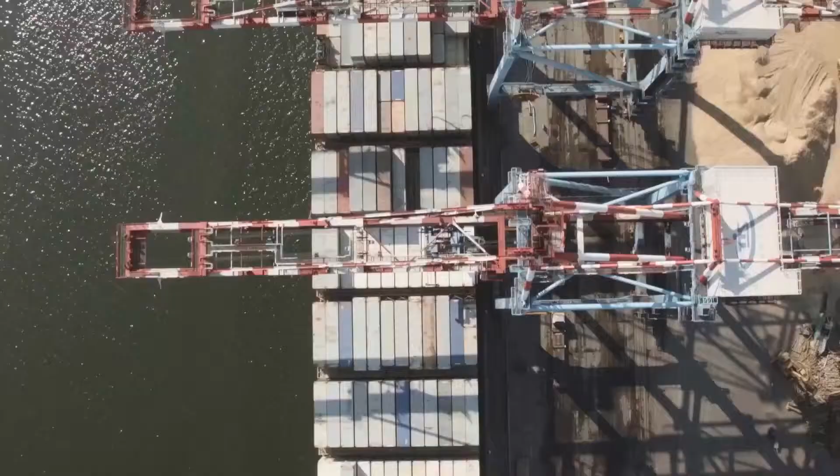Odessa is the grain gate of our country. Our city was the first in Ukraine to open a grain market. Odessa Miller School was the first to educate food manufacturing industry specialists.

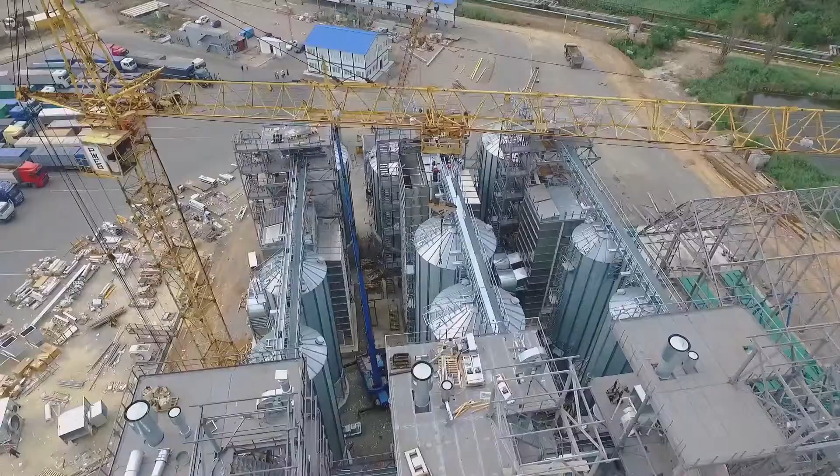We were the first company to start offering the whole range of services for project planning and grain complexes constructing. For more than 25 years, we remain a progressive Ukrainian manufacturer which implements innovative technologies and supplies services in the sphere of grain storing and processing.

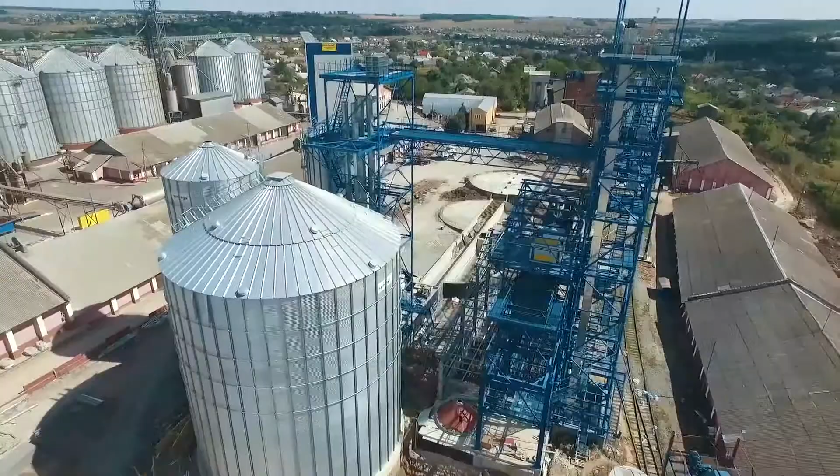Grain Capital Group of Companies is a powerful and solid giant in the Ukrainian grain elevators market. Grain Capital Group of Companies consists of elevator equipment plant and Grain Capital Engineering Company. We perform project planning, designing and building of grain elevators and terminals, as well as automation, dedusting of grain elevator complexes and feed milling plants. Our company manufactures equipment and trains personnel.

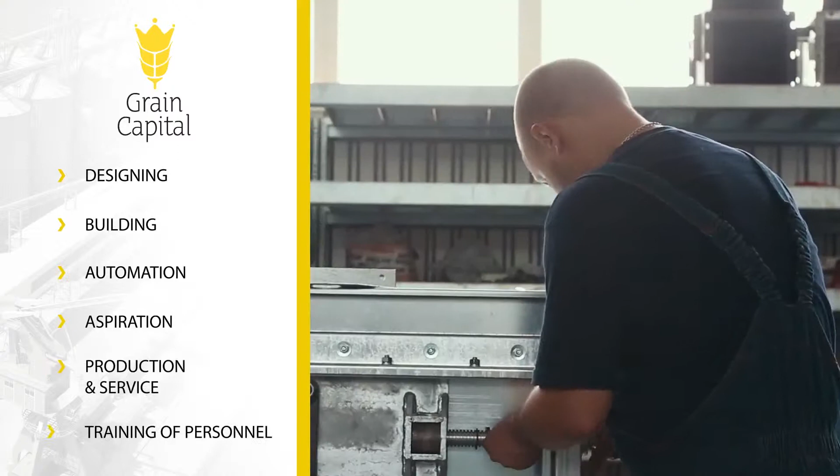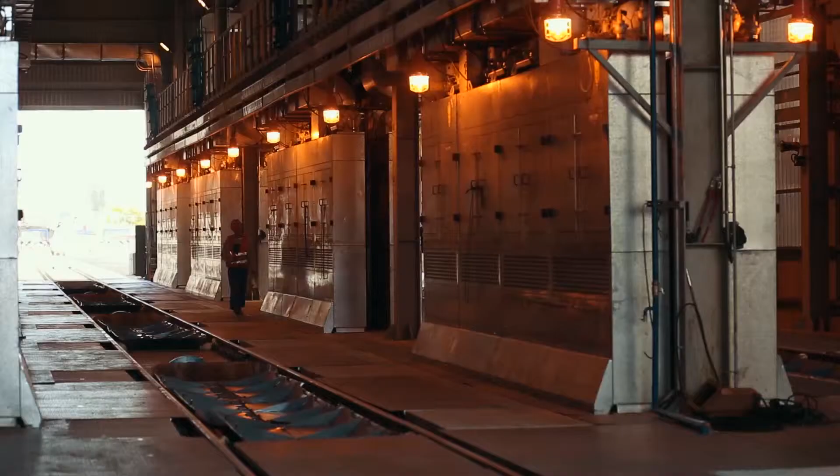Grain Capital Group of Companies' work priorities directly connect us with modernization of cereal receiving points such as grain elevators, grinding mills, feed milling plants on the one hand, and create the conceptually new enterprises on the other hand.

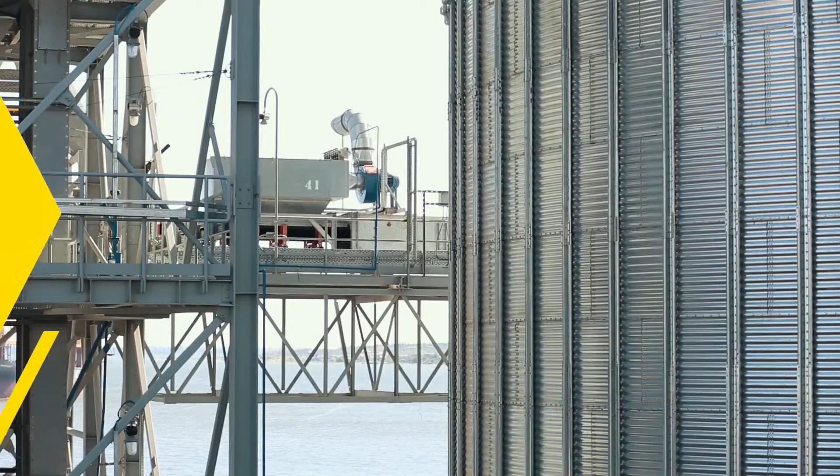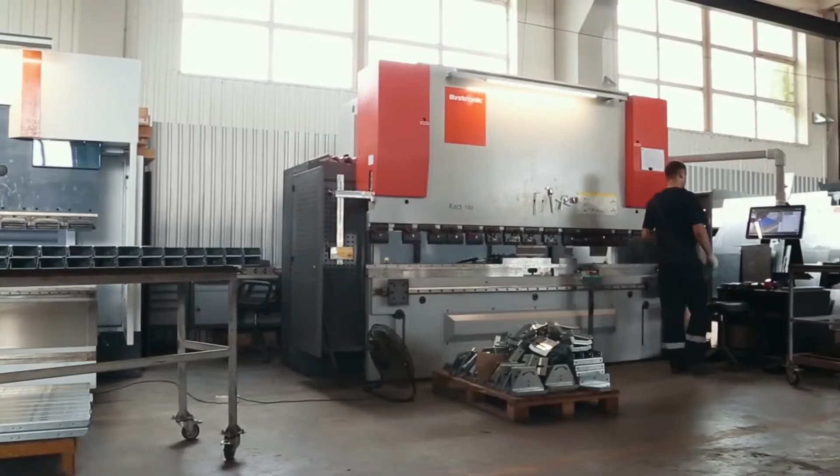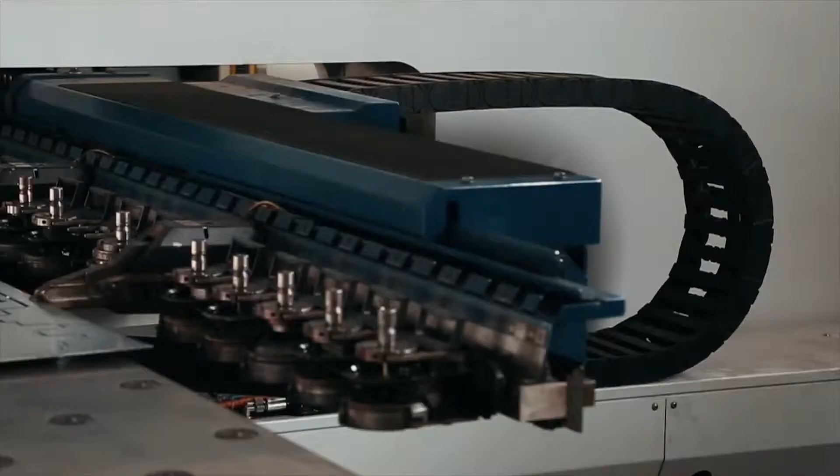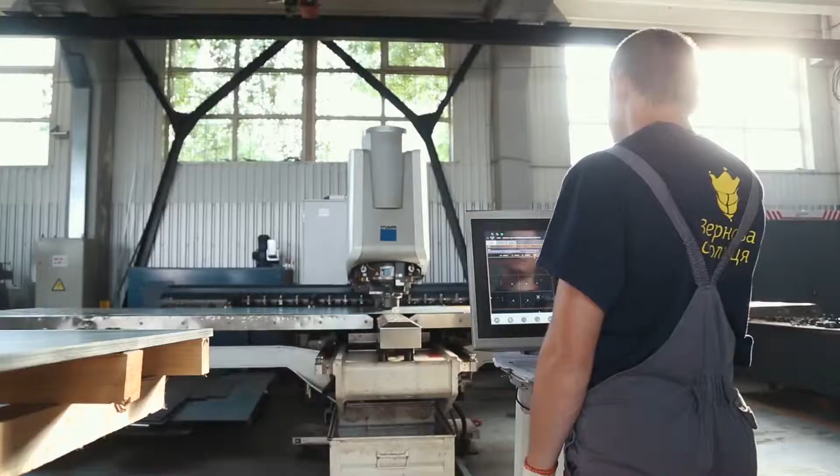ISO 9001 quality system is implemented at the enterprise. All our equipment is manufactured at modern machine tool stations with the use of high-quality imported materials and component parts by leading world manufacturers. Almost all the equipment installed at our factories is of the highest class and allows correct and precise manufacturing of our equipment for international and local markets.

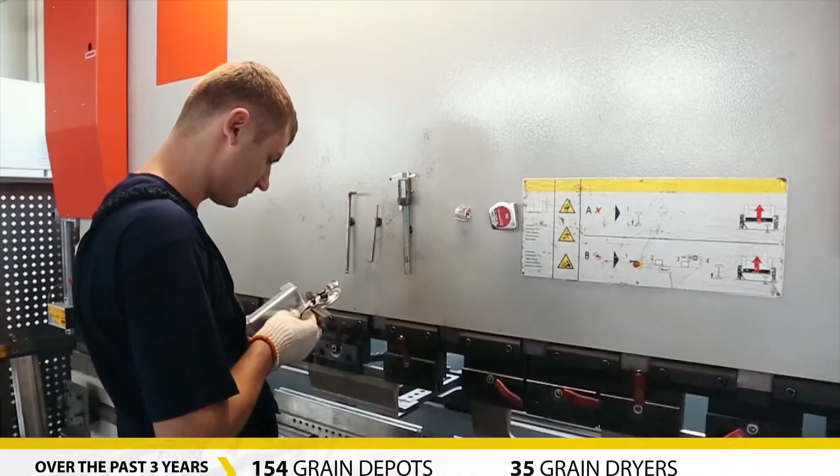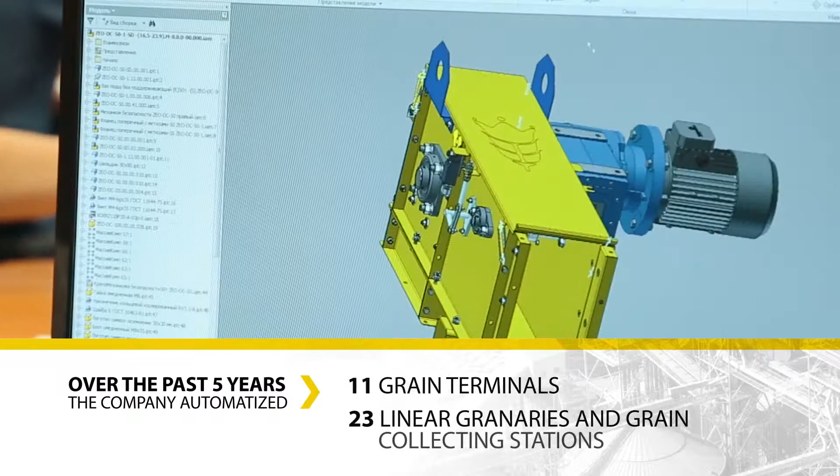Construction development at the enterprise is performed in single environment. This allows construction managers share information, perform total unification of details used, apply component parts of trusted trademarks and avoid mistakes.

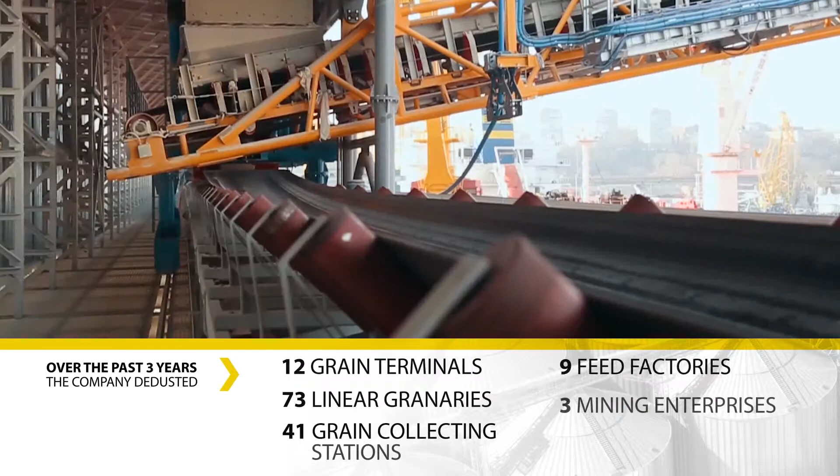Conveying equipment is a base for any grain elevator. Our production facilities allow manufacturing horizontally oriented conveyors such as slider conveyors, chain conveyors, belt conveyors, or vertically oriented bucket elevators.

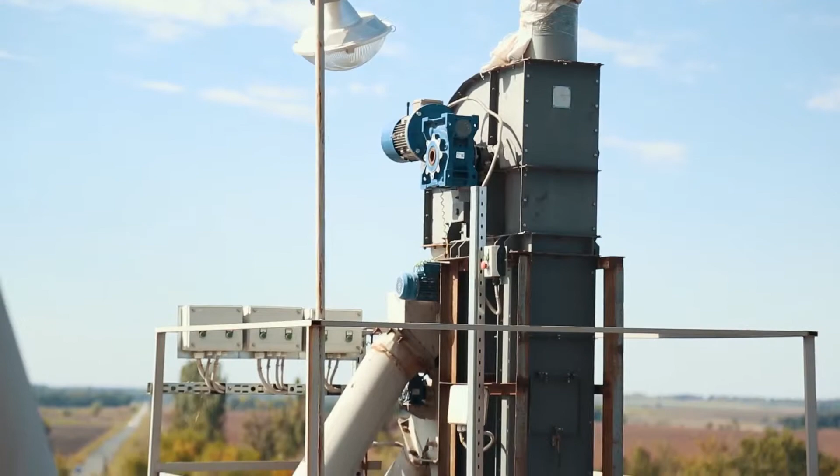Ukr-Elevator Prom company cooperates with Grain Capital Group of Companies for 10 years. For all this time, the company was showing itself as a reliable partner.

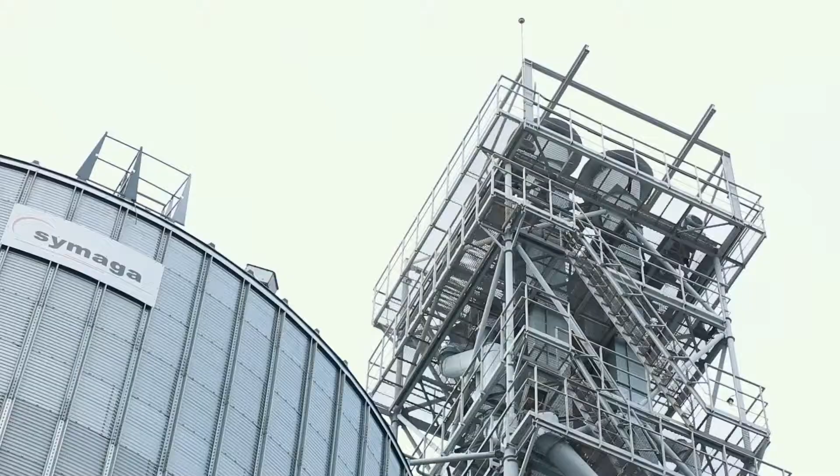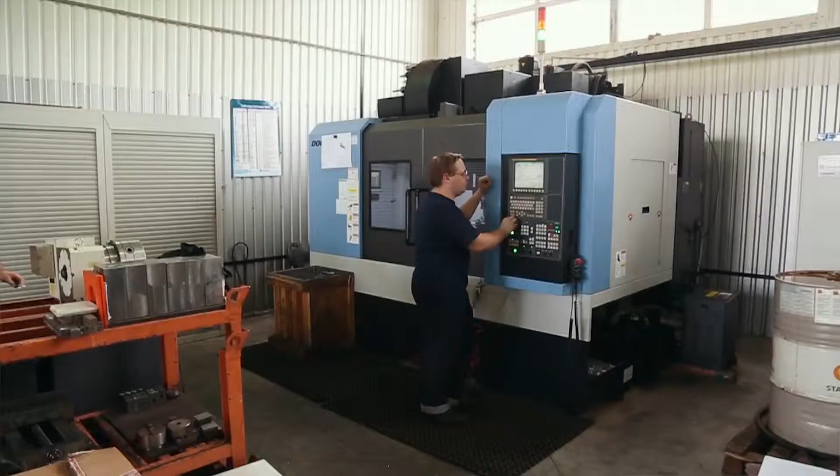For us, the main priorities in creating any new enterprise are quality, processability, reliability, energy efficiency, and safety. Our important advantage is a team of professionals. Their level of knowledge and skills corresponds to the level of employees of the transnational corporations.

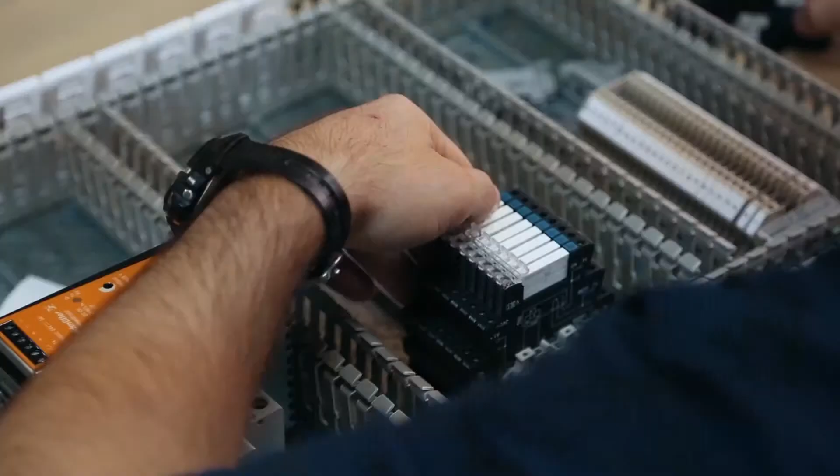Our company is unique in a way that we perform turnkey-ready services from project planning to putting the object into operation and setting up a ready-made business. We do take the full responsibility for this.

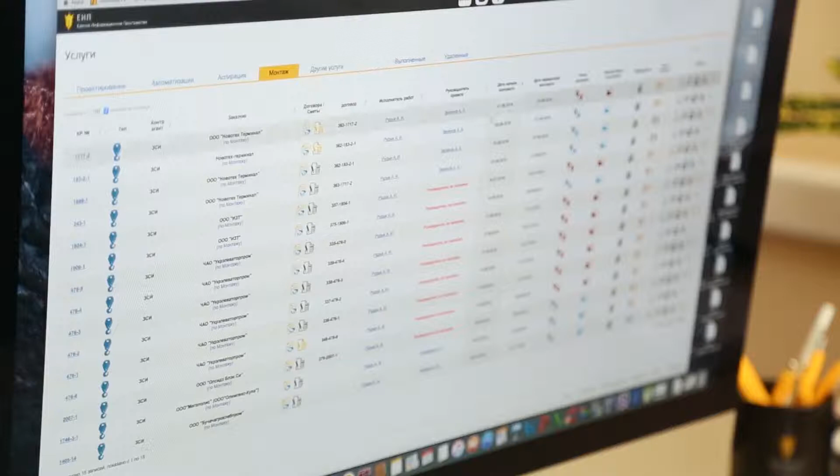Successfully implemented Common Information Space Network has shown itself as a good advantage. It allows effective interfering in any business process that takes place in a company even in time of peak loads.

Properly organized economy is an integral aspect of any enterprise's work. This means honest and transparent relations with suppliers, smart norm setting and fair wages. All this is necessary for creating a successful company ready to supply high-quality equipment to the customer.

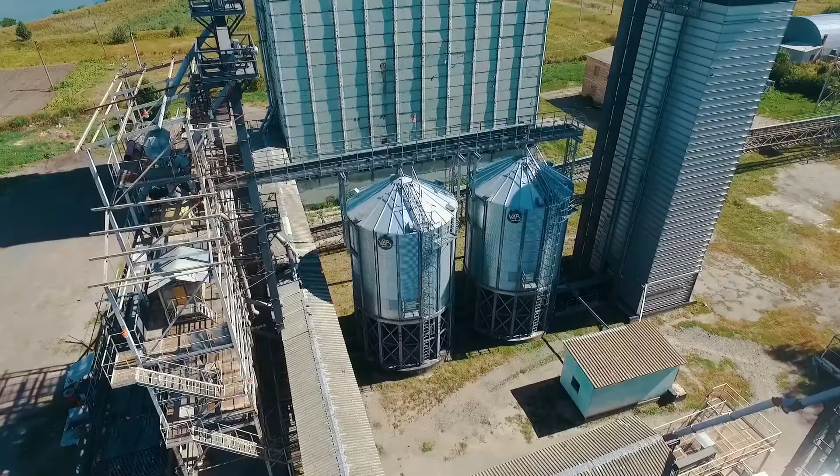Our company owns 2 grain elevators. We have been cooperating with Grain Capital Company for more than 2 years. In 2014 we have put the first grain elevator into operation. We have purchased all the lifting and conveying machines from Grain Capital Company.

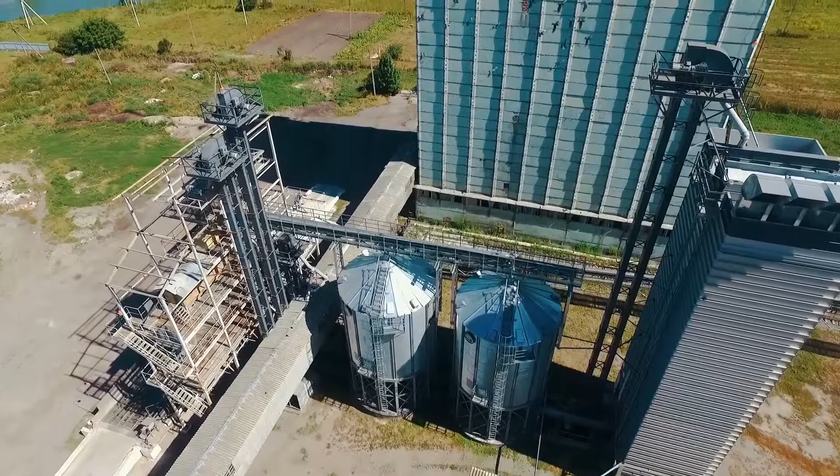In 2015 we have put into operation the second grain elevator complex in Berdichev. Again, we bought all the equipment from Grain Capital. I believe this is the company that has the best quality-to-price ratio in Ukraine.

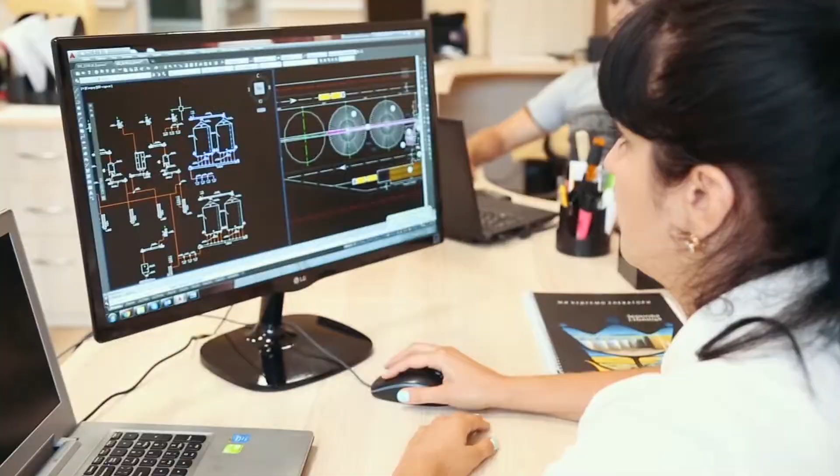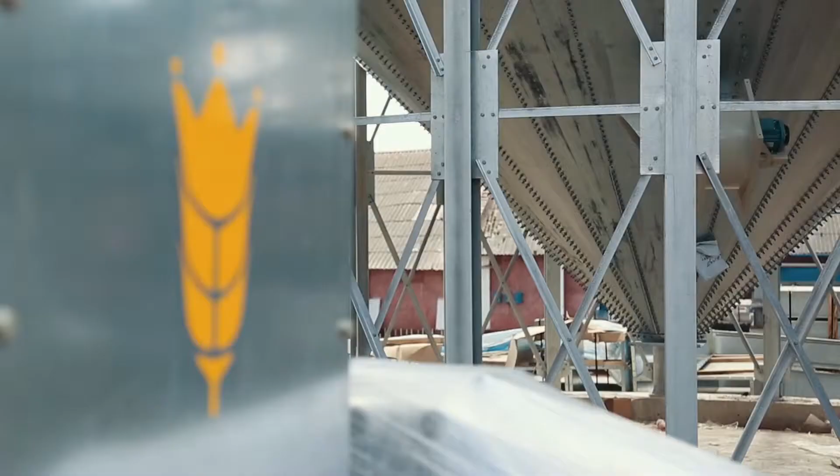We offer our clients a complex of effective solutions in building more profitable grain elevators that possess optimal characteristics and range of advantages in comparison with currently existing enterprises.

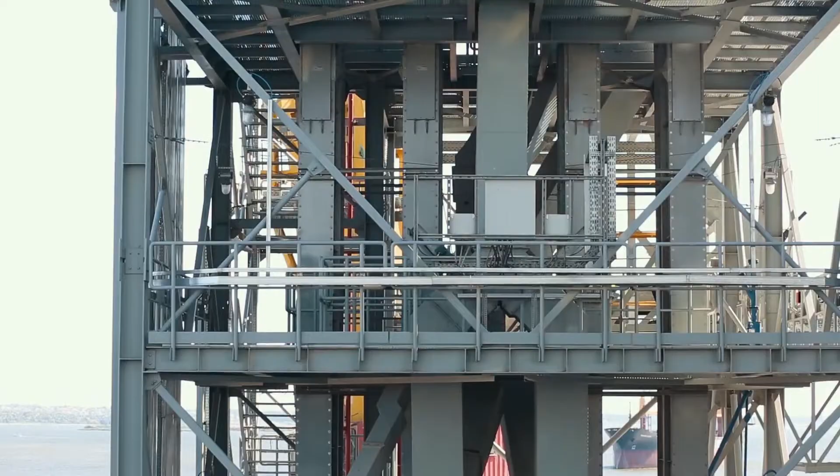I should say the main result of our work is not just a highly productive, innovative equipment that has no analogs in Ukraine. I'd like to mention layout decisions for grain elevators and grain processing enterprises, as well as automation systems, ecological safety systems, and grain elevators building technologies as our main achievements.

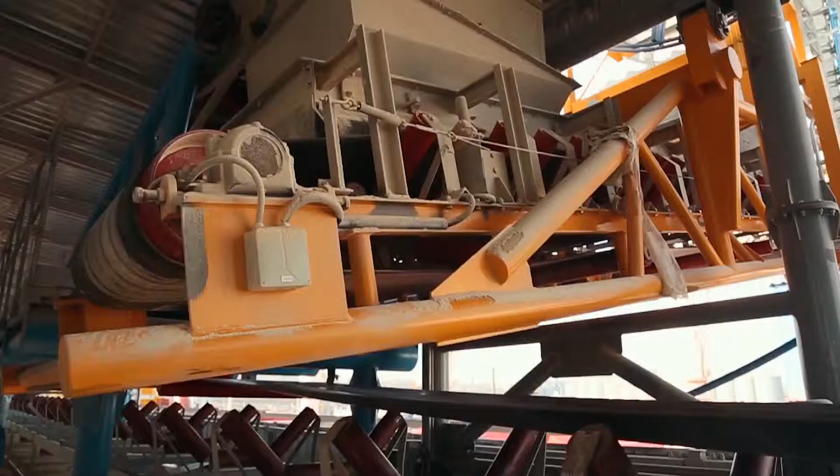We have a maintenance service department in the structure of our company that ensures non-stop operation of our partners' grain elevator equipment. All the emergency cases are addressed in a timely manner and by means of quality troubleshooting.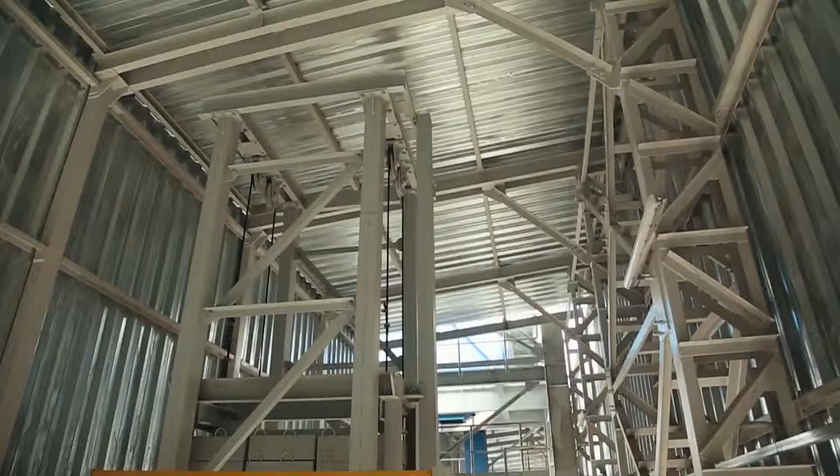Grain Capital is responsible for maintenance service at our enterprise. They perform diagnosis, chronology and all the necessary reports. The company promptly responds to any damage of our necessities. We are with them, so to say.

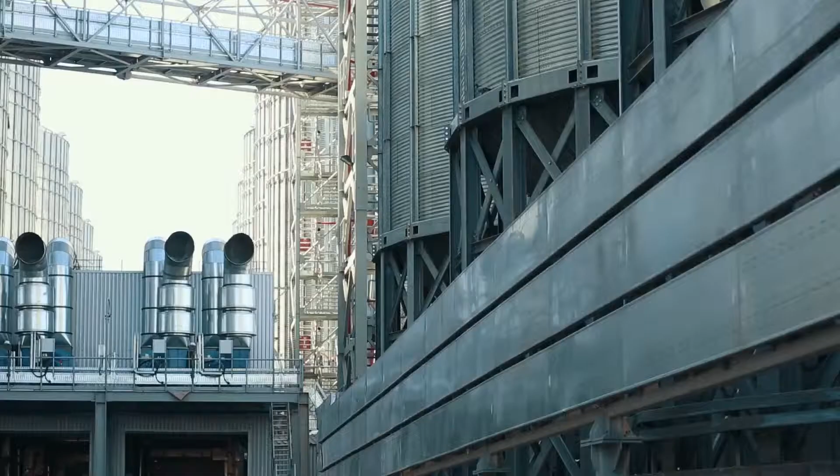Any company's goal is receiving the income, but not every company's CEO asks himself the following questions: How well do you do your job? How social are your rules for the employees and for the country? Are the measures you take innovative and foresighted? We ask these questions every day.

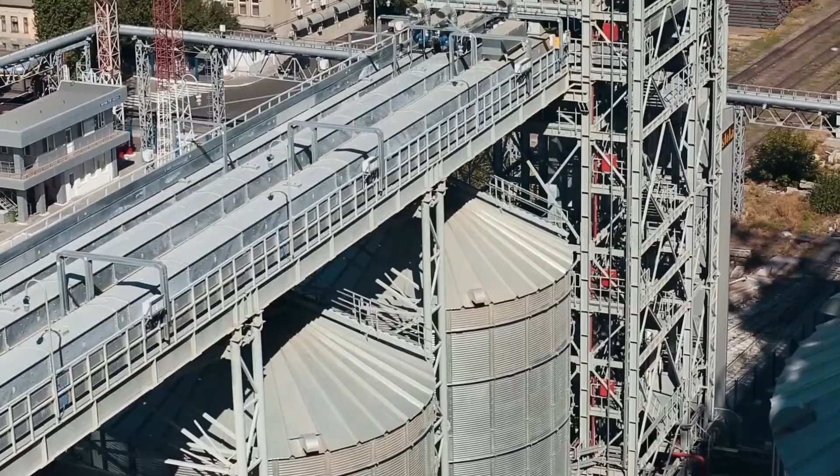One cannot just build a grain elevator and forget about it. Precision, technological perfection and competitive ability of projects we build are the most important things for us. Our motto is "Professionals for Professionals."

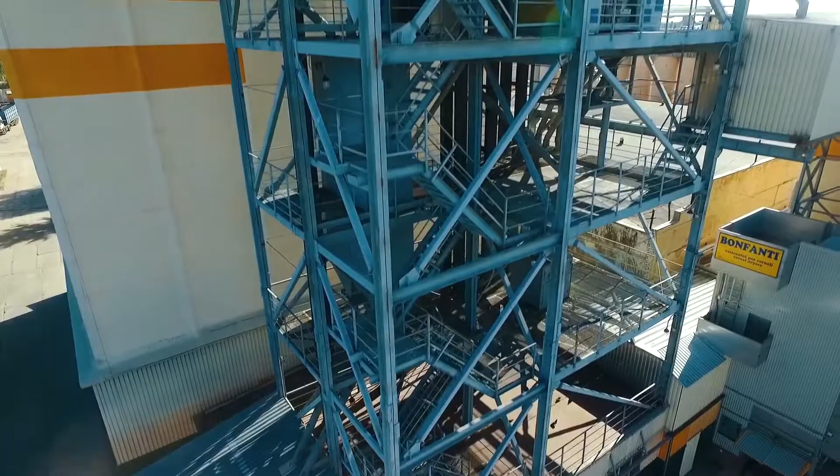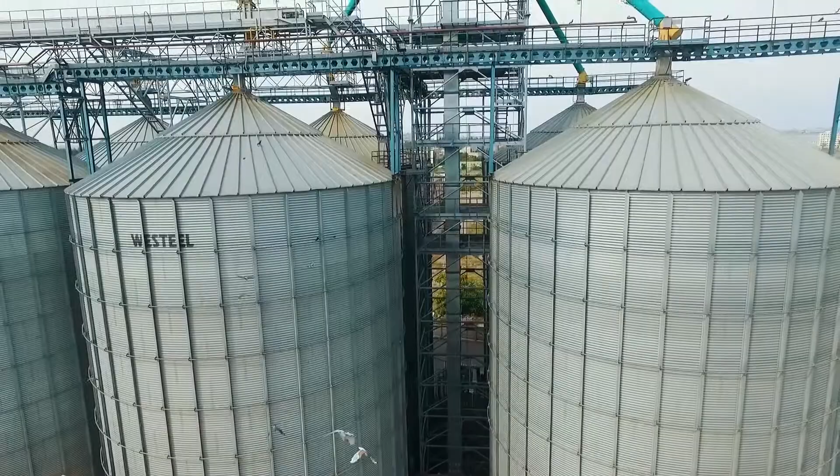Cooperation with us will lead your newly built or reconstructed grain processing complex to faster return of investments and profit-bringing. Our experience is hundreds of renovated enterprises. Our partners trust us and we appreciate that.